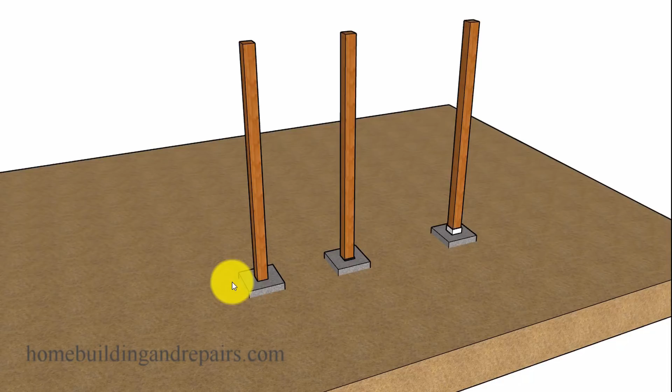In this video, I will not be providing you with the perfect fence building solution. I cannot figure it out. I have not been able to come up with any single idea that will work everywhere.

So what I did in this video was come up with a solution that could be used with future repairs in mind. So if we build the fence, understanding that we could have possible damage to the wood fence in the future, and maybe make it to where the posts are going to be a little easier to replace in other parts of the fence, then we might be onto something.

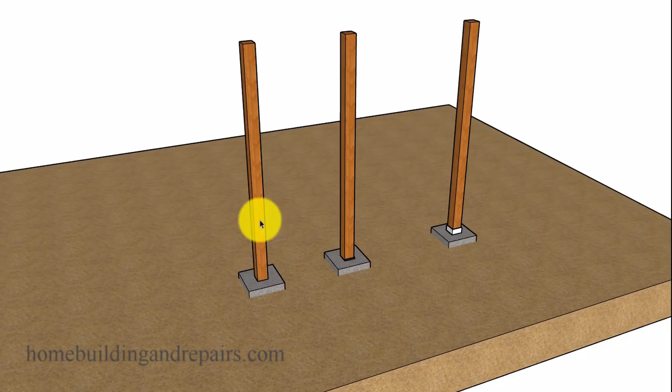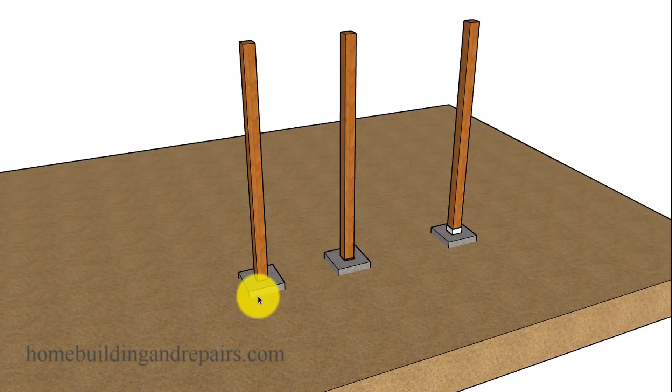It's kind of like trying to solve a problem that just isn't going to be solvable. And that, of course, would be the rotting of the wood in the concrete or in the soil. That's just something that seems inevitable in some areas. But I think we can build the fence with the thought in mind that it might need to be repaired in the future. And how can we actually make these repairs a little easier?

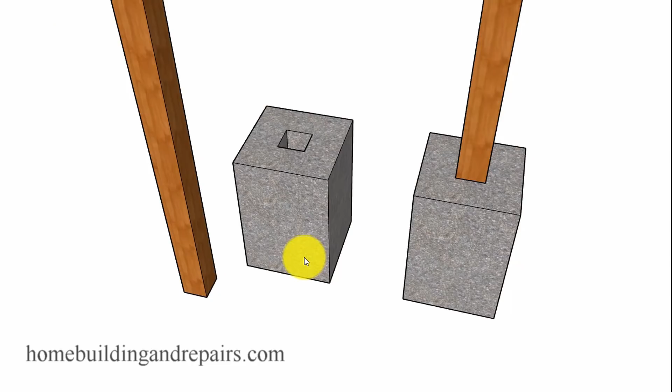The first thing we need to do will be to no longer pour a concrete post footing around a wood post that is going to be difficult to remove. Now, if we just pour this concrete around the wood post, it's going to be difficult to remove the wood post, and it's going to be difficult to replace the wood post because most wood posts are not going to be the same size. So if you could somehow find a smaller post, it's probably going to fit, but that just doesn't seem to happen.

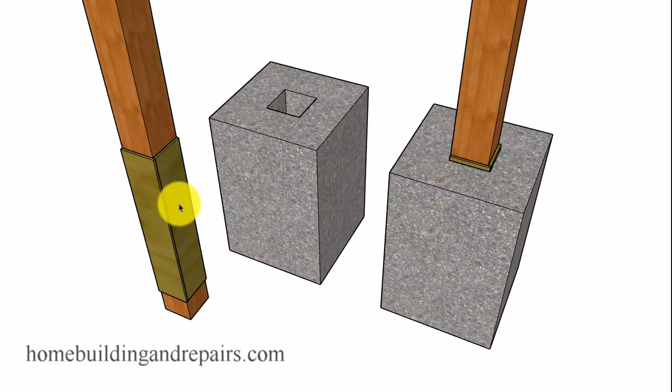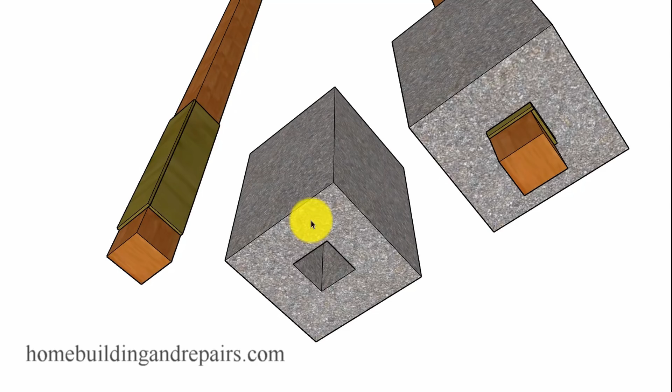So in order to prevent that, we will need to add a couple of pieces of wood, plastic, metal, whatever you think you can use to create a larger hole to pour the concrete footing around. So by simply adding two pieces to the sides, and you can add these pieces to all four sides if you want, but I think two pieces should be enough. And this will create a larger hole, and in that hole we will be able to slide a new fence post in rather easily.

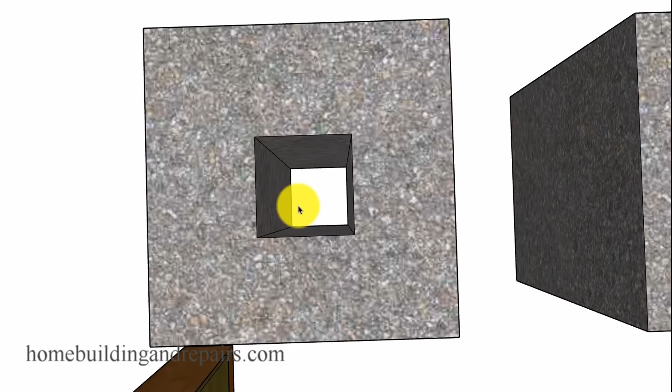And I'm not suggesting that we're always going to be able to remove the fence post without much effort. If a strong wind comes up and blows the fence post down and breaks it off right here, that's not going to be an easy post to remove unless somehow you've created some spacers that can be pulled out. And you might be able to do this with some type of plastic, and I haven't come up with a solution for that. This is actually something I've done. I've put scrap pieces of wood next to these and replaced the fence post with relatively little effort.

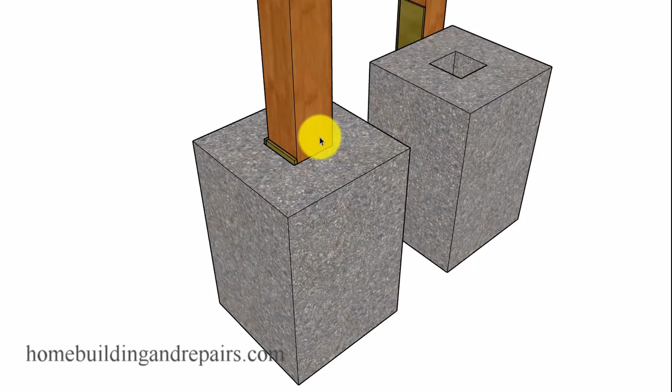This method allows us to reuse the concrete footing, if you can remove the post without a lot of effort. That's kind of what I'm saying. So if the post is rotted, it's probably going to be easier to remove. If a strong wind comes up and blows the fence over and breaks it off right here, you're going to be drilling some holes in the bottom of the wood. This will not be easy to remove. So this is not a fix-all solution for every single problem you're going to have with your wood fence.

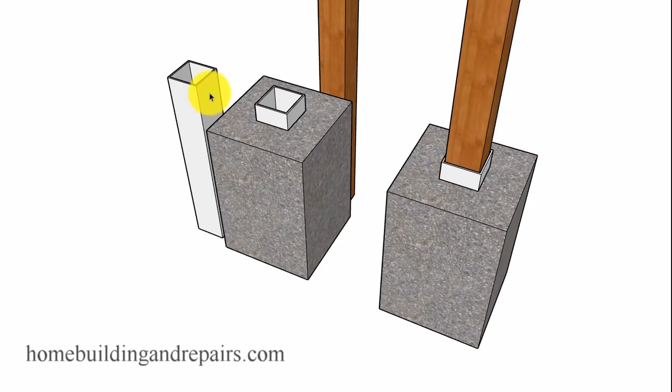Now here's a solution I didn't think of. Someone else left this on my channel one day, and I thought it was a great idea. They used some type of vinyl fence post covering, something that can slide over a 4x4, and they installed it inside of a concrete footing.

And it might not need to run all the way through. I'll leave it up to you whether you're going to encase the post in the concrete or leave it through like this. I mean, if you have it coming through like this, the bottom of this can rot, but the sides might not be rotting as easy, is kind of my point with this.

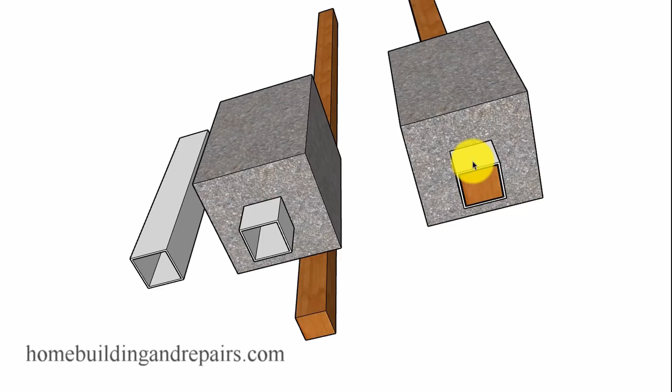I really like this idea, but it's going to be a little pricey. I think these pieces were around $20 a piece, and you could cut it up into whatever sections you're going to need, but how much money that's going to add to your fence building project, or whether it's going to be worth it or not, I will leave that up to you. This is just another suggestion.

As far as the rest of the fence is concerned, I would suggest using screws whenever you possibly could to attach anything to any other component, including the wood post. Let's face it, if you had to remove the wood post and it was built this way, you're going to need to be able to push the top of the fence over a little bit so you can get the new post in.

Or let's just say a strong wind came up and blew a section of the fence over, you're going to have a fence laying on the ground. You can just start taking screws out, and some of these boards will be salvageable. You'll be able to replace sections of the fencing by simply taking the screws off and pulling the fence boards off and then reattaching them to any boards that have been destroyed in some way.

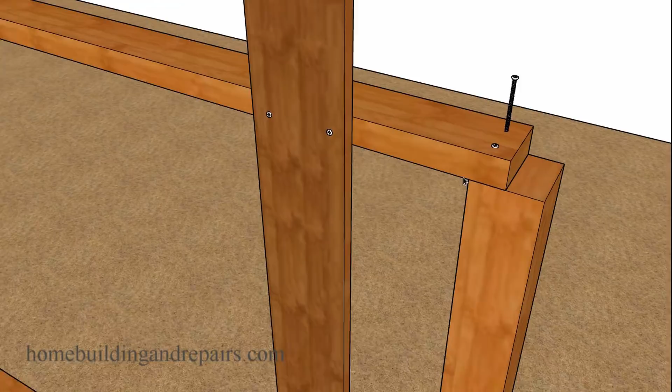So screws going into the top railing, down into the post, screws attaching the fencing to the railing, screws used like you would nails in any way, and you could always pre-drill holes if you have a difficult time putting them in at an angle. Another view of it there. Galvanized screws would be pretty good, or something that isn't going to rust. And then you can always use straps too.

And I have nails here because it would have taken me a little while to put screws in. But even if you did use nails for something like this, I would imagine it'd be easy to pull it out. But again, screws are going to work better. Let's use screws on these fences, if you can. If you need to use nails, I got you. You're just going to have to pull the nails to do the repairs.

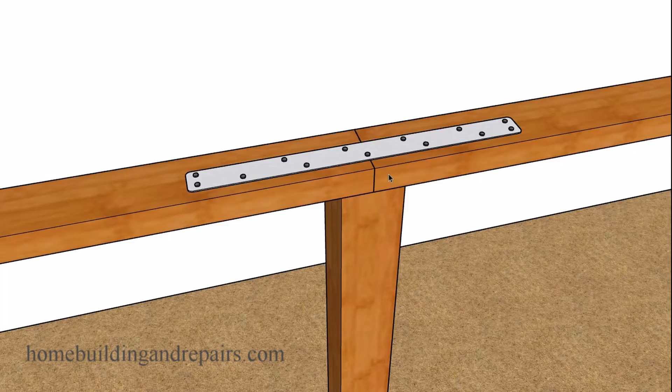A strap across the top, strap on the side. And again, this is just an option. You could just put a couple of long screws in here and be done with it. No strap would be necessary. You could use some type of framing anchors, again, to attach the railing to the post.

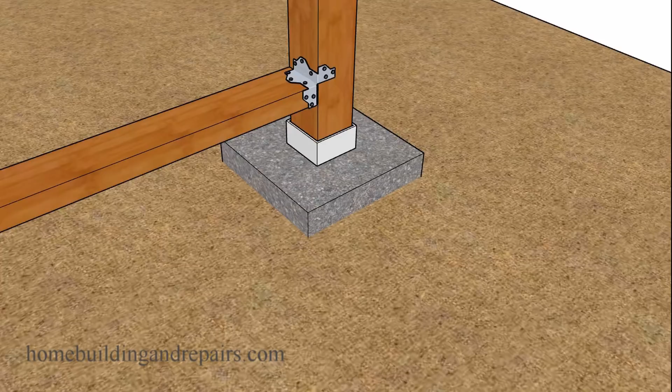And that is it for this video. So again, if you're going to build a fence and we just can't do anything about the post rotting, other parts of the fence, you live in an area where you're replacing your fence every 10 or 15 years, this might work out great for you. You live in an area with high winds and sections of your fence get blown over, again, this might be a great solution. And you can always use a combination of these ideas with your own to create a stronger fence, or one that would be easier to repair also.